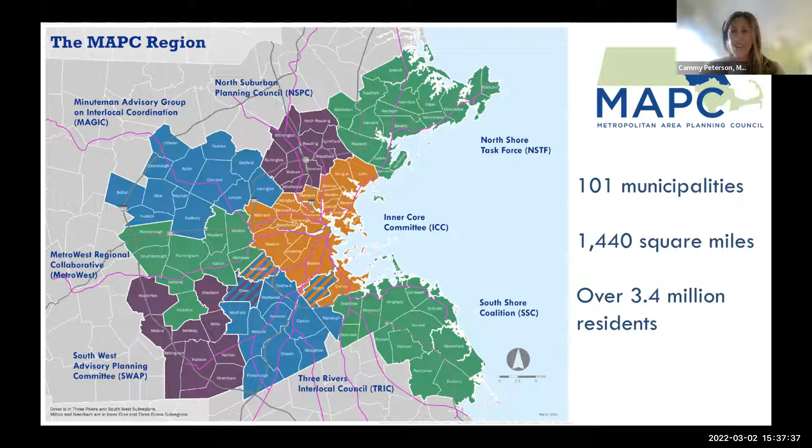Just a very quick introduction to who we are at MAPC for those who might not be familiar. We're the regional planning agency for the 101 cities and towns of Metro Boston, a mission-based public agency created by the legislature over 50 years ago. We have over 100 employees that work with these cities and towns and across the Commonwealth. Our clean energy division does work in a number of areas related to clean energy, energy efficiency, and renewable energy, as well as climate mitigation and resilience across projects, planning, programming, and procurement, providing technical assistance, support, education, and awareness building. We've done a lot of work on codes over the years and in building decarbonization, both at the local, regional, and state level, and so we're very happy to be continuing this conversation today.

We really see net zero as a framework for holistic climate planning. It's been one of our primary frameworks to move our work forward over the last 3 to 4 years, and we see it as having the potential to be a vehicle for multi-benefit outcomes. A better building, a net zero building, or net zero as a means for climate action in general can lead to really productive energy outcomes, economic development, workforce development outcomes, equity, diversity, and inclusion outcomes, better public health outcomes, and increased livability for all.

In that work, buildings has become a particular focus of our work. As you can see here with numbers that were updated last in the fall of 2020, with data partially through 2019, building consumption continues to be the second largest sector of our emissions after transportation, and just a really big chunk of that carbon footprint.

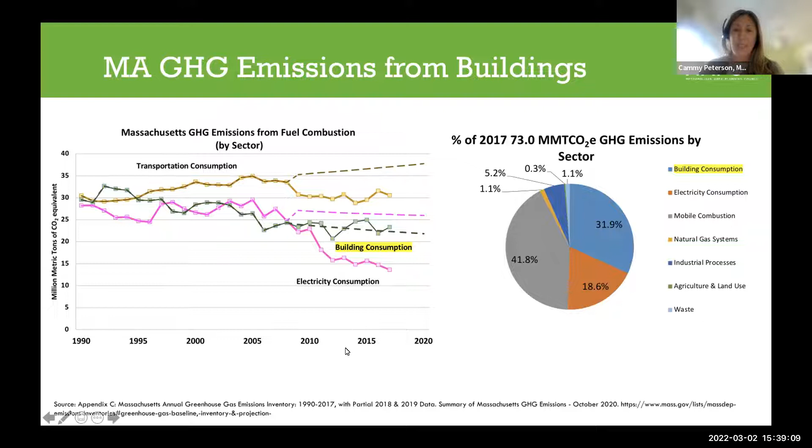Looking to see how we can reduce those emissions, decarbonize, and make our buildings healthier, more safe and comfortable for all those multi-benefit outcomes is a huge priority of ours, and a place that we've been focusing a number of our programs and policy efforts.

As we move away from fossil fuels in those decarbonization efforts, there's a lot that we can get to through electrification. This simple illustration shows that in just moving away from gas heat in a boiler, for instance, to electric heat from a heat pump, in just 2018 grid numbers, that's a very significant decrease in the amount of carbon that's produced per unit of energy.

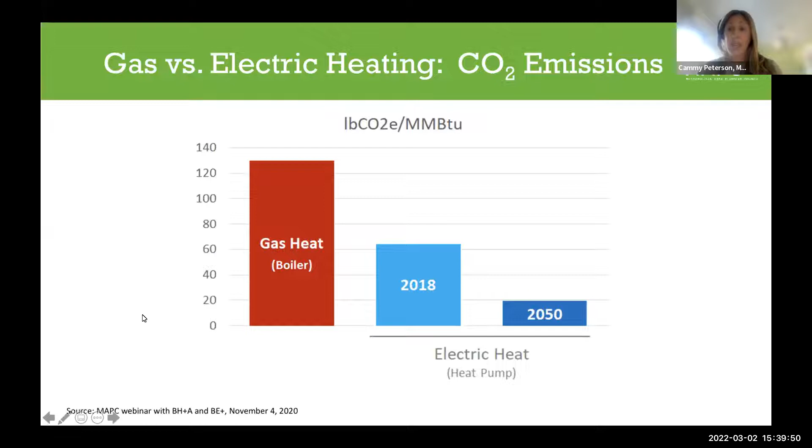And as you look out to the grid in 2050, obviously it gets much, much cleaner. There's much that we can do through that simple transition from gas to electricity. That's been something that's a critical key in unlocking the building decarbonization efforts that we are looking at.

So if you take into account what you can get through electrifying our space heating and our hot water, the thermal demands in our buildings, add to it very robust energy efficient envelopes for our buildings—those enclosures well insulated and weatherized to the extent that they can be to make the energy demand as little as it is—electrify what's left there, and then provide that electricity through renewable energy, all to the extent possible throughout all three of these. You have the formula for getting to net zero in the way that we've been looking at it.

That's the magical mix that we see to help us move forward in the building decarbonization sector that we've been focusing on. And that really brings to the surface why codes are so critical. We see that as one of the major levers in being able to advance this work.

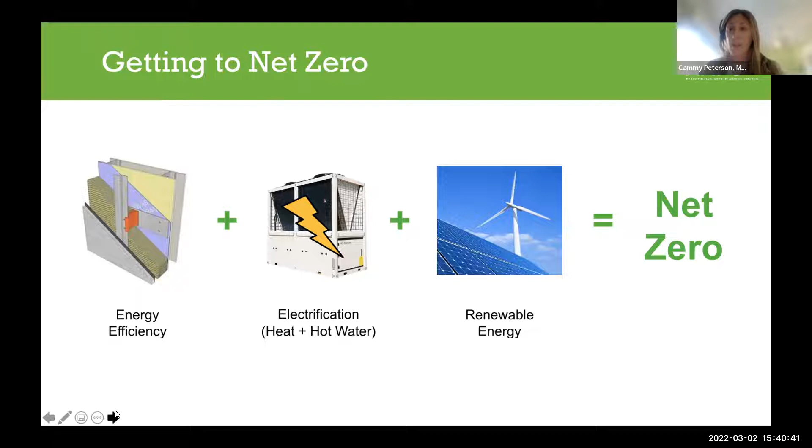But there are a number of ways that we can look to improve our buildings, especially from the perspective of cities and towns, and ways that they can impact local level building policy or affect that at the state level.

So one of the things that we can do as part of the process right now is DOER talking more about the public hearings that are starting as early as this evening. That's for giving public comment on both the stretch energy code proposal as well as the new municipal opt-in specialized net zero code. There are opportunities throughout the process, through the base code process at the BBRS, to provide comment there as well.

Cities and towns can adopt the stretch energy code or the new municipal opt-in net zero code as of December for the latter of 2022. So that's an action that cities and towns can take to advance their energy efficiency and climate efforts for their building sector.

There's also zoning and other local ordinances they can do, really complementing that as a kind of full package for advancing building decarbonization. And they can enforce that. So not only is it important to adopt these policies, but then to really make sure that they are being enacted and carried out to full effect on the ground.

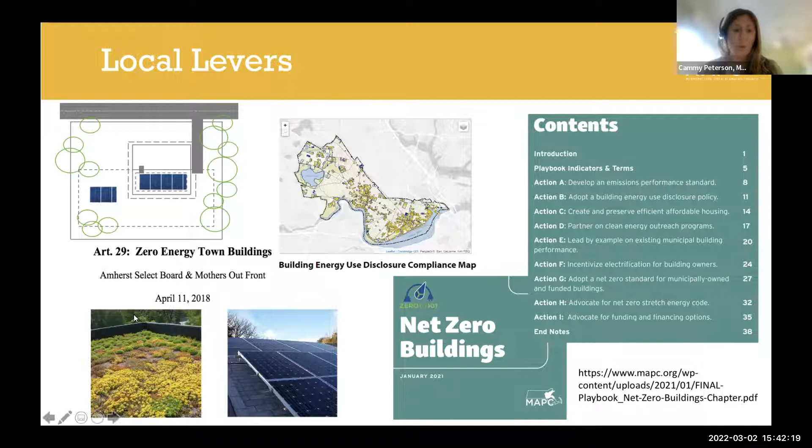I'll spend just a quick moment here on those local levers. It's not the purpose of this webinar, but there are a number of different measures that cities and towns can take that they have direct control over, things like BERDO and municipal buildings and zoning. There's a number of different strategies you see here in the table of contents from MAPC's Municipal Net Zero Playbook, and there's a good amount of information if you click on that link, which I'll provide at the end too, for how to move those strategies forward. But cities and towns cannot have their own building code.

So at the state level, that's a place where they can really have a voice and help to make sure that it's helping to advance the needs that they have.

And building codes are life safety codes. Even if you think mainly about the efficiency component, which is a huge part of it, all these benefits come from having a very energy efficient building. Add in the effect from supplying the electricity through renewables, and you really can get to that magical mix that I was talking about.

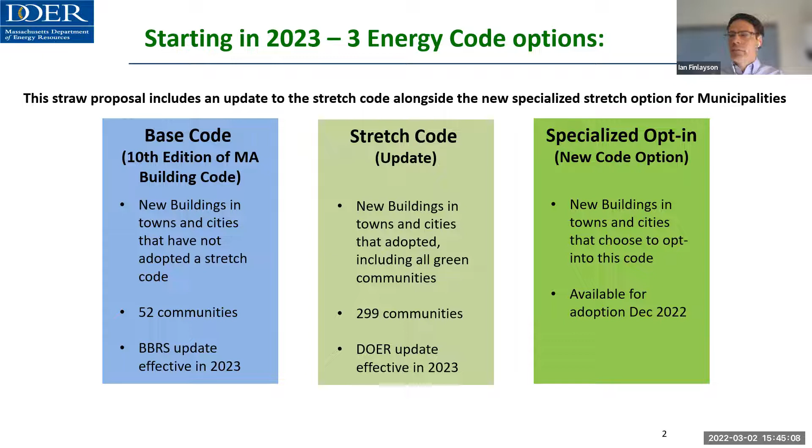So to help track progress along this route through 2022, we have a new web page up. I know it's impossible to copy down web links on presentations, but hopefully this can be shared later, or you can just Google Stretch Energy Code Development 2022. Also, if you have signed up for updates, they will send you to links off of this web page. This is going to be our clearinghouse for information, including the webinar from 2 weeks ago, the recording of that, and subsequent to that, we have another presentation slide deck up summarizing the analysis that's been done.

Okay, so let's dive into a recap of the webinar on the stretch code, and then we can get to questions. So I'm going to start with a couple of slides on the residential side.

And so this is the stretch code update for current stretch code communities or future stretch code communities. The residential side is going to look familiar to folks who've been using the stretch code for a while. Right now we have HERS 55 as the primary route for stretch code adoption. We also allow passive house, that's going to continue. And lastly, at the moment, we have Energy Star homes as a pathway, mostly used by multifamily developers.

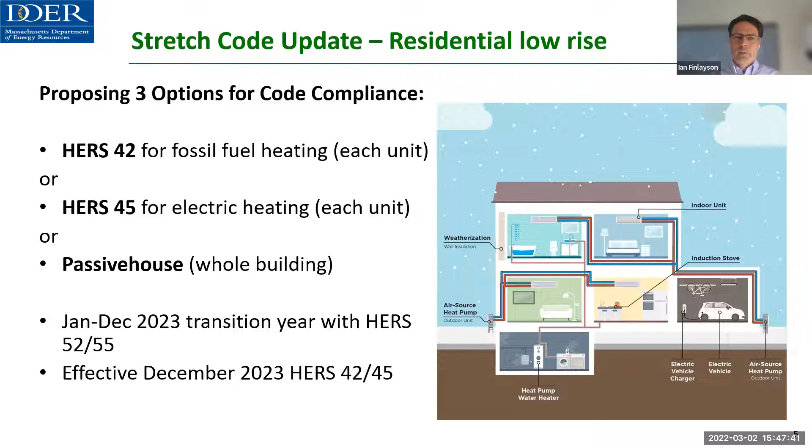Now, when we compare that with the new opt-in or net zero code, the differences here are fairly straightforward.

Essentially, we are allowing fossil fuel use in new construction still, and we'll come back to that in questions. But wherever anybody's using fossil fuels, whether it be for heating, water heating, cooking, appliances, then that will trigger a requirement for rooftop solar and a requirement for wiring that home for future conversion to be all electric. And we can get into that in more detail later on as well.

If you start with a home that is all electric, then essentially the specialized opt-in code is not asking for much different than the regular stretch code. And if you choose the passive house route, passive house allows either fossil fuel or all electric construction. And so if you choose to use fossil fuels, say for water heating, then you would also have to pre-wire for electrification in the near term.

And then one thing that maybe gets overlooked a little bit is across all the building code updates, base code, stretch code, and the opt-in stretch code, we will be bringing in EV ready wiring requirements. So essentially, single family homes will be required to have wiring in place for one vehicle to charge, and then multifamily, 20% of spaces in the opt-in code and 10% of spaces in the base code or stretch code. So that's a very quick summary of residential. I want to hand over to my colleague Paul Ormond to do the same thing for commercial.

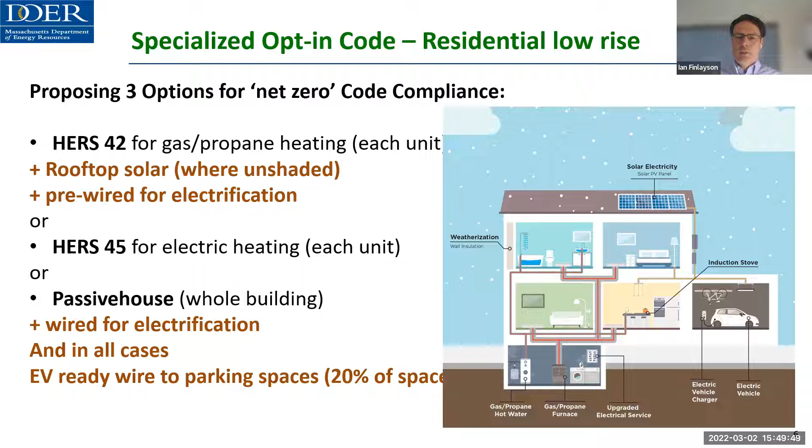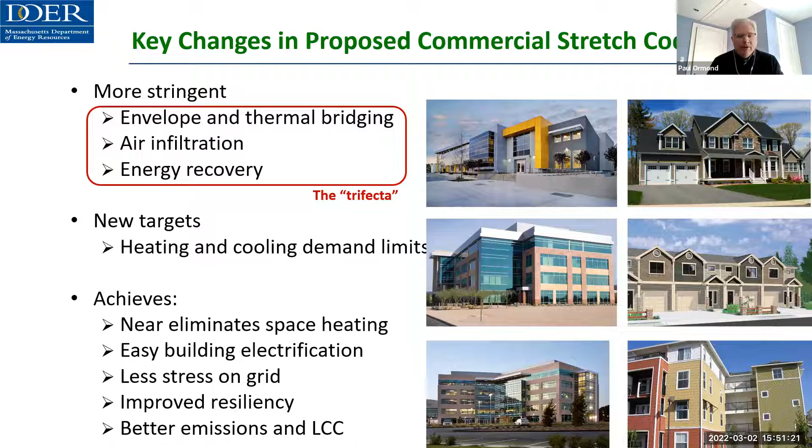So when your trifecta is working well and you have good envelope, air infiltration, and energy recovery, your heating and your cooling loads can be very low. And what we're really concerned about is the heating loads, because that's where you use gas, right? So in addition to our more stringent prescriptive trifecta elements, we're actually proposing a new target in our stretch code called the heating demand intensity target. It's abbreviated TEDI, the thermal energy demand intensity, TEDI.

So when you do all this, the outcomes are buildings with extremely low emissions. They're very easy to electrify. They reduce or eliminate fossil fuels. It has much improved resiliency because these kind of buildings stay warm in the winter if you lose power, or stay cool in the summer if you lose power. And much improved comfort. So we're capturing all the benefits of Passive House through these new strategies that are in the proposed code.

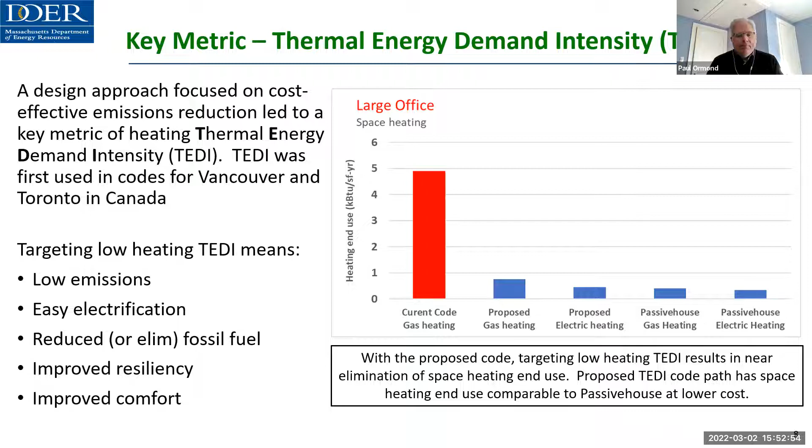Okay, so I'll jump back in now, and we want to go into the Q&A period where we address questions that were submitted in advance. And we've broken those into some topics just to organize them efficiently. So I'm just going to dive in here. Here's our first topic. So there were a number of questions about clarifying the timeline and adoption options for different municipalities for these new codes. And we're going to break that apart a little bit.

And so we're in the initial public outreach, public hearing phase of the stretch code update and the new specialized opt-in code. And then folks may or may not be aware, but the Board of Building Regulations and Standards, which has jurisdiction over the base code, they have posted proposed updates to the base energy code on their webpage. They've been up for a couple of months, and they're plowing through remaining building code chapters that are not energy related, and then they will have their public hearing on that in the summer, hopefully.

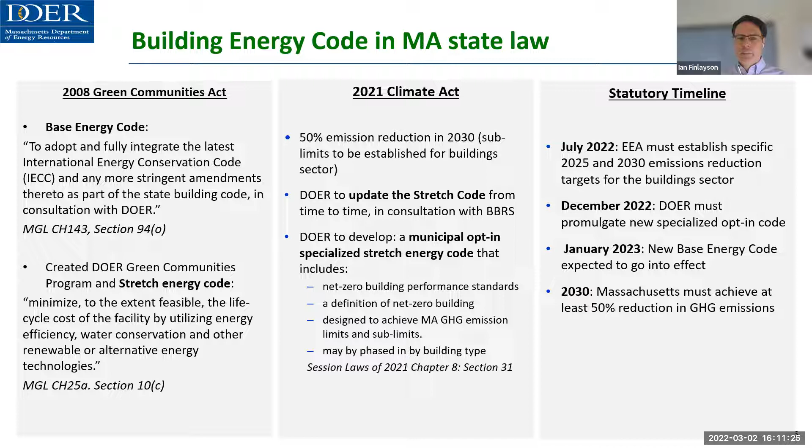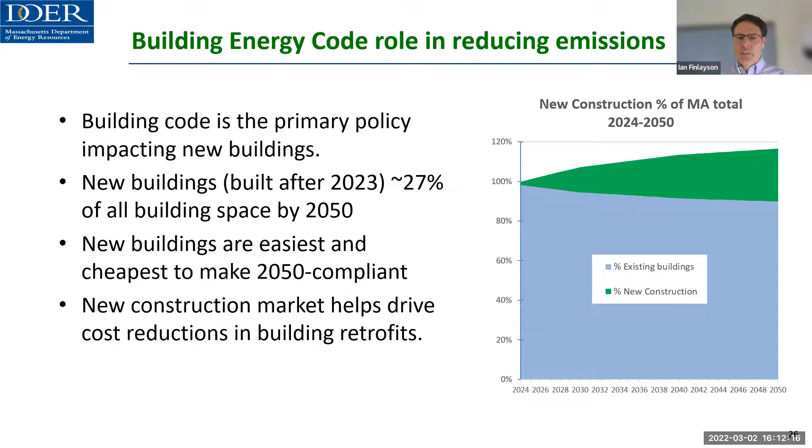So yes, they're a significant part of meeting our 2030 goals and our 2050 goals, but there is also all this blue here, and that will require additional policies and tools to help reduce the emissions from those buildings.

The other thing that our analysis has shown is that we can do this in a way that actually saves money and makes more money available for reinvesting in the Massachusetts economy. And that's maybe a difference between the potential of the opportunity for new construction and the potential in existing buildings, where retrofitting existing buildings will save money, but it's not as cost effective as the sort of design and implementation that we can do in new construction.

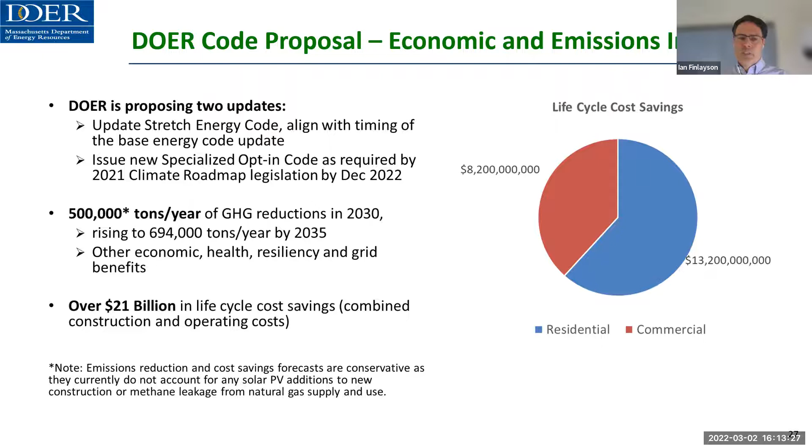Okay, another big question about fossil fuels in the specialized code. So both the stretch code as proposed and the specialized opt-in code as proposed are allowing builders and developers to use fossil fuels in their buildings. We're very aware of the discussion around restricting or limiting that. We've seen that a number of municipalities are working on that.

I'm guessing that a number of folks on this webinar are aware that the Attorney General had to disapprove a second round of bylaws from Brookline. And if you take a look at what the Attorney General's letter says there, essentially it points out that there are multiple laws and regulations in place at the moment that make it difficult to give municipalities the authority to ban fossil fuel connections.

Now, the state building code is listed as one of those, but legally, and I'm not a lawyer, but our legal team is not sure that we can restrict fossil fuel use through the building code and survive a challenge because of the other existing laws in place. So this is something that the legislature could look at and clarify for everyone.

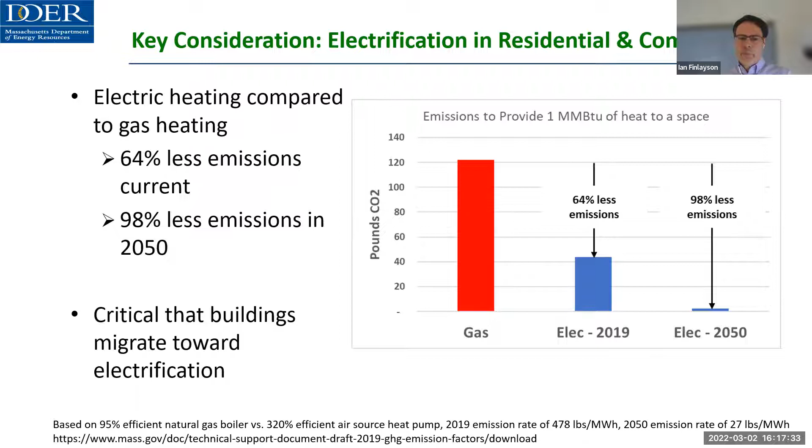So the code is really designed to have it just almost not make sense to continue to use gas. It just makes more sense to use electrification under this new efficiency code. Yeah, thank you for that, Paul. And we can get more into that in questions if there's time.

So another key issue, and we only got one question from this group on this, but we've seen this question from other stakeholders, is about the net zero definition that we've put forward in our straw proposal. I think this is a quite well phrased question. The draft appears to allow on-site fuel combustion for heating, domestic hot water, cooking, other uses, and how is this consistent with achieving net zero operations?

So a couple of things here just to clarify. There are multiple definitions of net zero that include fossil fuels. So even on a single building basis, if you have some fossil fuels in a building, you can offset that with renewables or other clean energy sources, either on-site or off-site, depending on the definition. So I think we want to separate out the fossil fuel use from the net zero definition.

And then when we're thinking about net zero definition, really thinking about the application to building codes and how they apply to different buildings in different site conditions. And that is something that we've been giving quite a lot of thought to, and really do welcome public comment on, because as we think about it more, it's not a simple and straightforward thing to operationalize in the new construction sector.

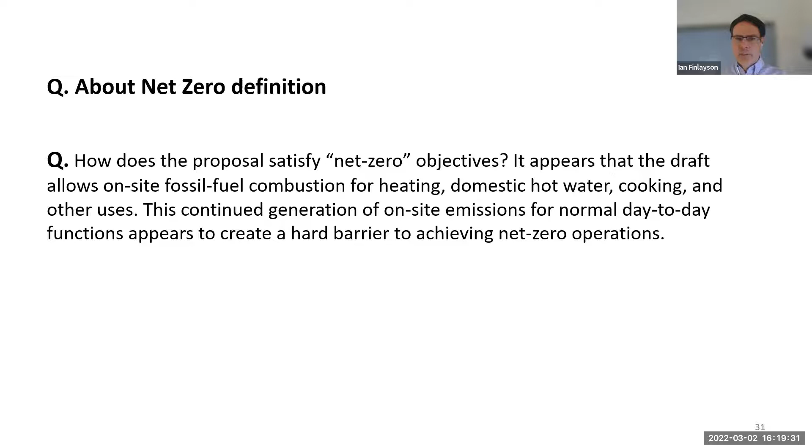Going back to the Climate Act, it asks us to have an opt-in specialized code that is compliant with meeting our 2030 and 2050 goals. And so we really took the long-term view of this and are looking to have new construction be 2050 ready or 2050 compatible. That obviously has some implications, and I think is a surprise to many stakeholders relative to some of the other net zero definitions that we've seen in code or in some of the submittals that the BBRS received and that DOER has received too.

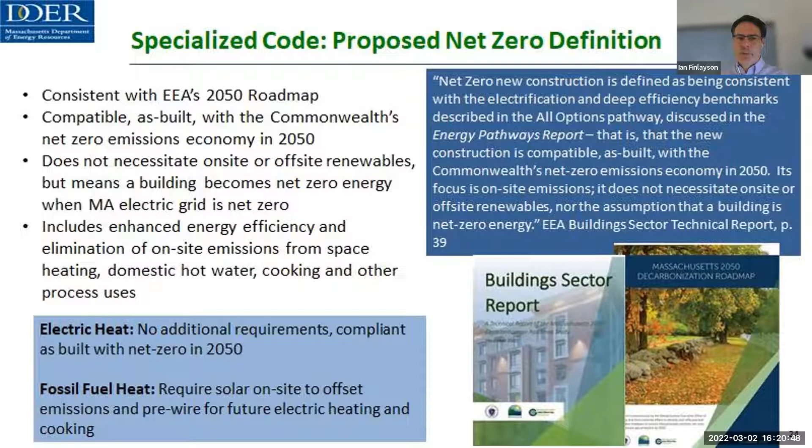So what does the net zero proposal that we've put out look like? I covered this briefly in the intro, but it means on the residential side, if you're adding any fossil fuel use to the building, whether that's for cooking or space heating or everything, that will trigger a solar requirement and pre-wiring for future electrification.

The solar requirement, though, is not to take that building to a HERS 0. The HERS rating allows for solar to be counted. So this HERS 42 number, I should have clarified this earlier, is a number before any renewable generation.

Adding solar, you can get to exactly HERS 0, and then you have an exactly net zero home. You can add additional solar if your site allows and have an energy positive home, which we've seen the city of Boston and other folks produce. But it is very dependent on site conditions.

We know there are a lot of homes that are under mature tree cover, and we don't want to set up a situation where there's an incentive to be logging established trees in order to create solar access to meet the net zero standard. Similarly, on the commercial side, we don't want to encourage greenfield development having an advantage over urban infill or brownfield reuse or transit-accessible development, which is likely to have less of a solar window to meet that net zero on-site requirement.

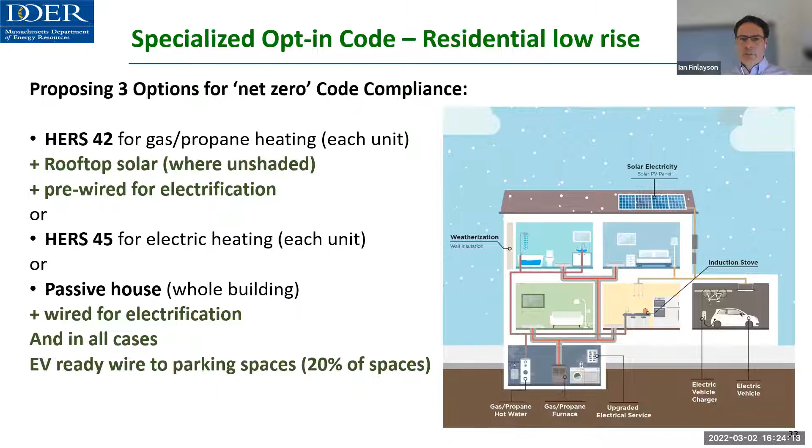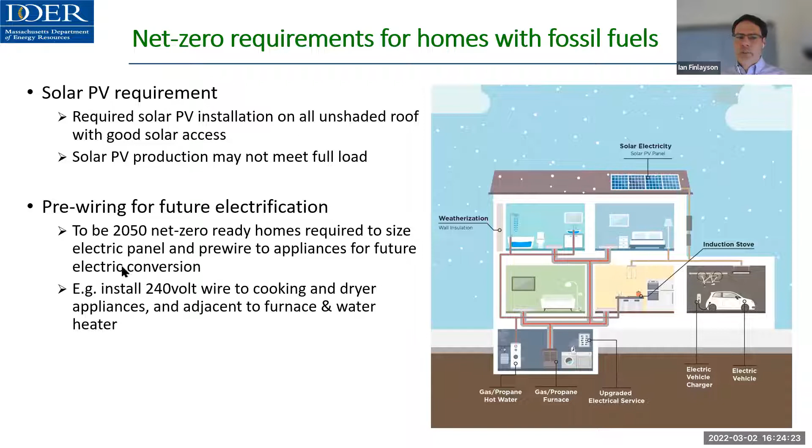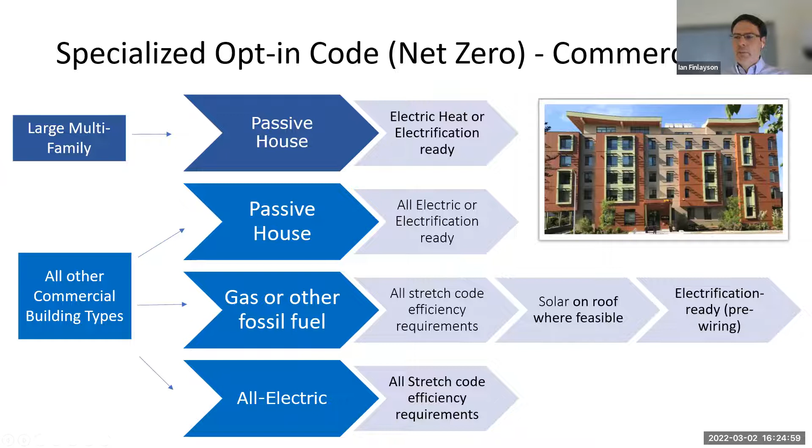Just going to skip over these slides a little bit, but this is a slide summarizing the net zero requirement for residential with fossil fuels, and this next slide is the same thing for commercial buildings. You'll see that we're being consistent across residential and commercial in saying that if a building is going to use fossil fuels, then they have to pre-wire for future electrification and also have solar on the roof, to make sure that they are contributing to some near-term emissions reductions, as well as being able to be net zero well before 2050. So I'm going to stop there because that was all of the previously received questions.